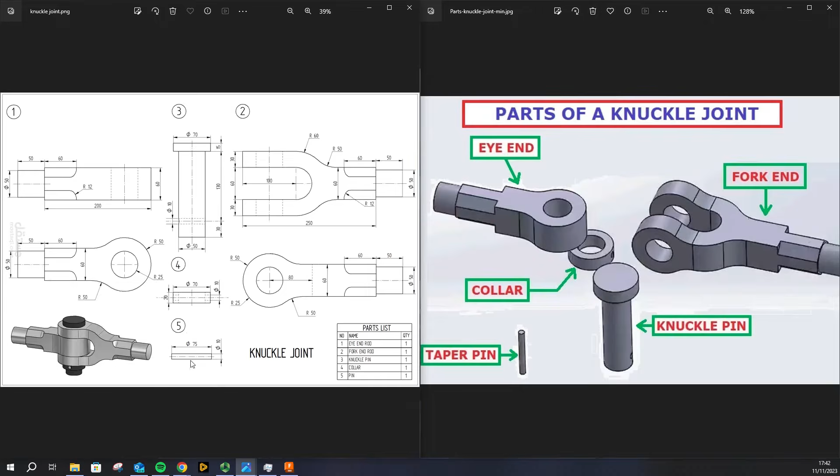Just one thing to point out that in this engineering drawing, this 75 should not have this diameter symbol. And if you see an R before the dimension value, it's basically a radius. And another thing to note is that if the units are not specified, you can assume them to be in millimeters. So let's make this cylinder of length 75 and diameter 10.

Okay, so in your Fusion workspace, let's save this file first and let's call it 5.pin. And very quickly, it's just a cylinder, so a new sketch, C for circle, diameter 10. And we know that we are right now in the sketch workspace because we have the symbol. So make sure you finish the sketch and we'll extrude this. So create, extrude, and the height is 75. That's it. So we've got our first part done. Let's save this.

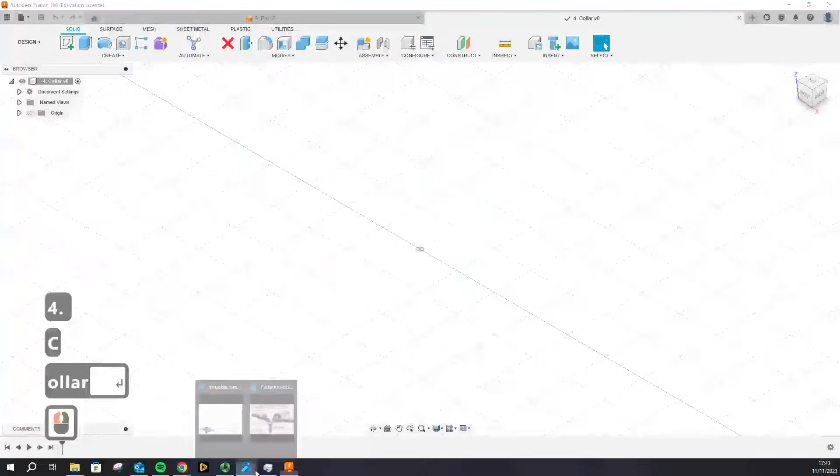Let's go ahead and start making the second part and save this as 4.collar. Let's have a look at the dimensions quickly. So the collar is essentially a ring and we can make it using 2 concentric circles. So over here, the outer diameter of that ring is 70 and we need to find the inner diameter. And if we can visualize the assembly, we know that the knuckle pin is what goes into the collar. So the diameter of the knuckle pin should be the same as the inner diameter of the collar. So we've got 2 circles, one with diameter 70, one with a diameter of 50. Okay, so let's make that.

So C shortcut, 50 and another one 70. Okay, let's finish this and let's extrude it. We need to know the height of the collar. So for that, we'll go back to the drawing. The total height is 20. So let's change this value to 20.

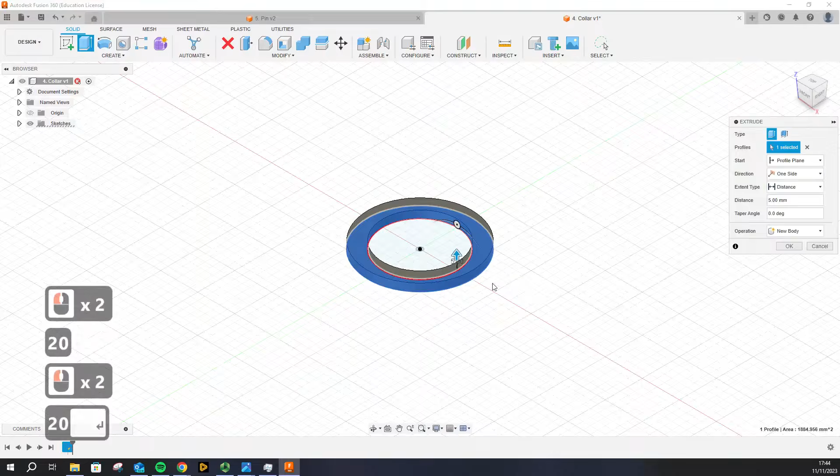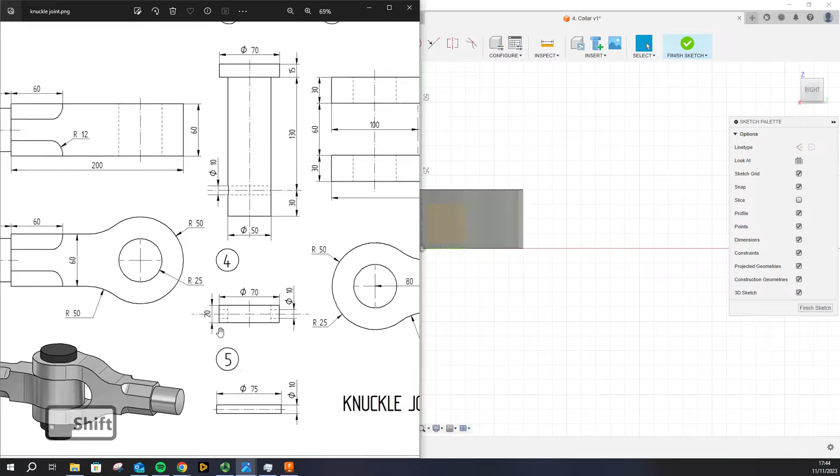One more step before we can finish the collar, we need a through hole. So as you might have already understood, we can use either of the two planes, so any plane that's perpendicular to the base plane. So let's choose that one. And we need to make a circle for the through hole. Before that, we need to find how high above from the bottom plane it is. And from this, we can figure out that the hole is at the center of the total height. So it has to be half of 20.

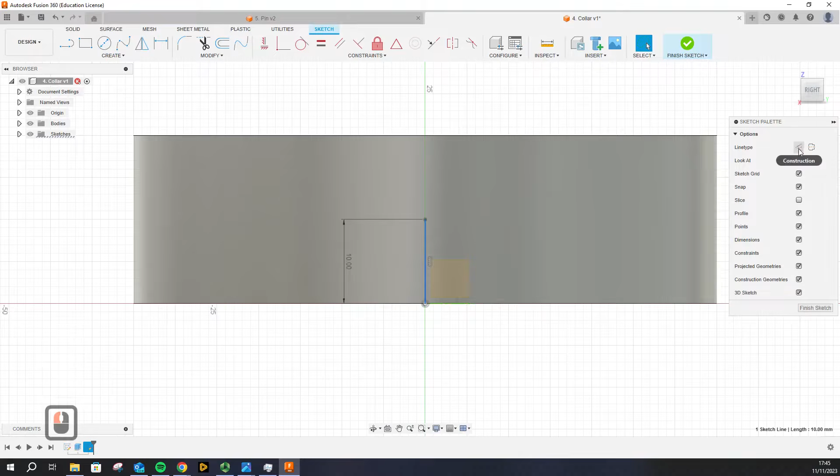So let's make a reference line from the origin and we can use math because Fusion can do math for you. So we can do 20 by 2, which is 10, but you can use Fusion for that. Let's convert this to a construction line. You can change the line type by clicking construction in the sketch palette. And let's start a circle. We'll use this point for the center of the circle. The diameter is 10 and we've got our circle here. So we can finish the sketch now and very quickly go to create, extrude and start extruding it.

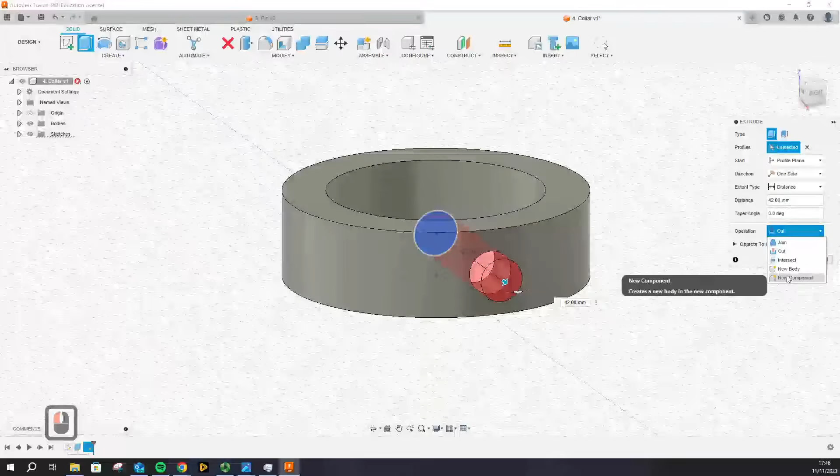One thing to note is that it is a new body that is being created and as soon as it intersects with another part, it recognizes that subtraction or cutting might be the operation that the user might want and that's why it changes to cut. You can also notice that from the operation in the dialog box. You've got multiple operations, so you can change it back to a new body or you can join it. But right now we want to cut it. Also, because we want it in both the directions, let's change it to symmetric. Okay, so that's our collar done. So let's save it.

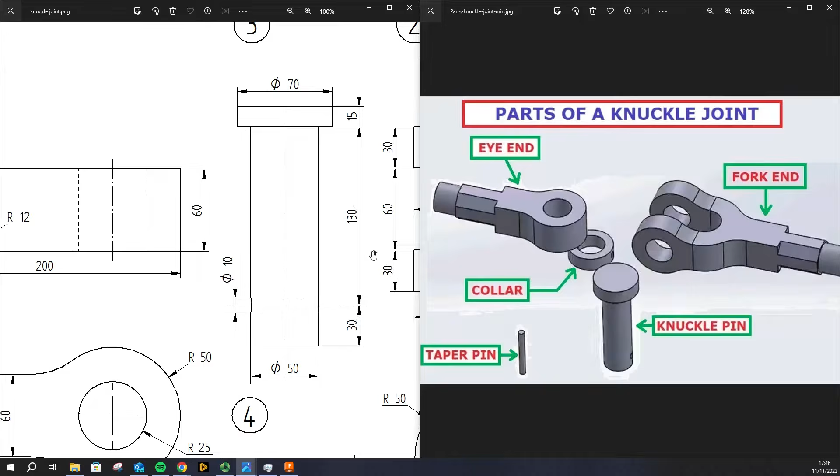Let's start making another part without wasting any time. Let's call it 3.knuckle pin. For that, we need the dimensions again. So knuckle pin is essentially a cylinder, a very tall cylinder with a disc on top and a through hole. So let's make this tall cylinder first. Two things for the cylinder, diameter and the height. So the diameter is 50 and how much is the height? It's 30 plus 130, right? So let's do that. Diameter 50. Let's make a circle. The same process. So C for circle, diameter 50.

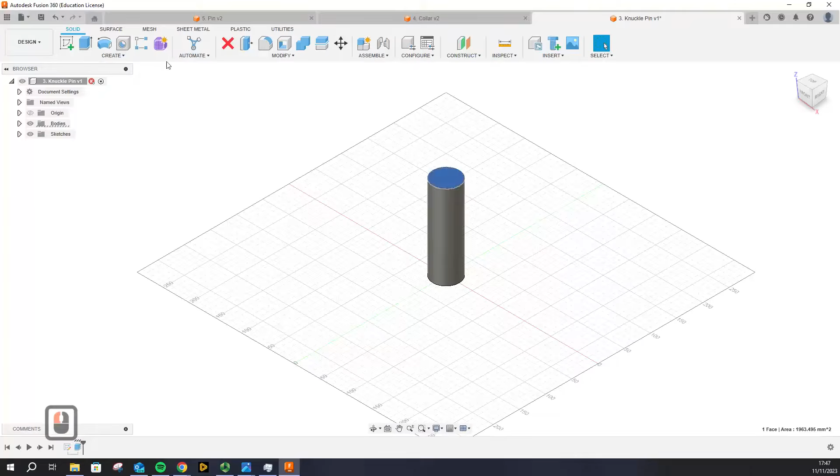Finish the sketch. Let's quickly extrude it. And we can do math, so 30 plus 130. So we've got a tall cylinder. This time we are going to start a new sketch on the top of the cylinder. So this will be our plane for the sketch. So click on that, create sketch.

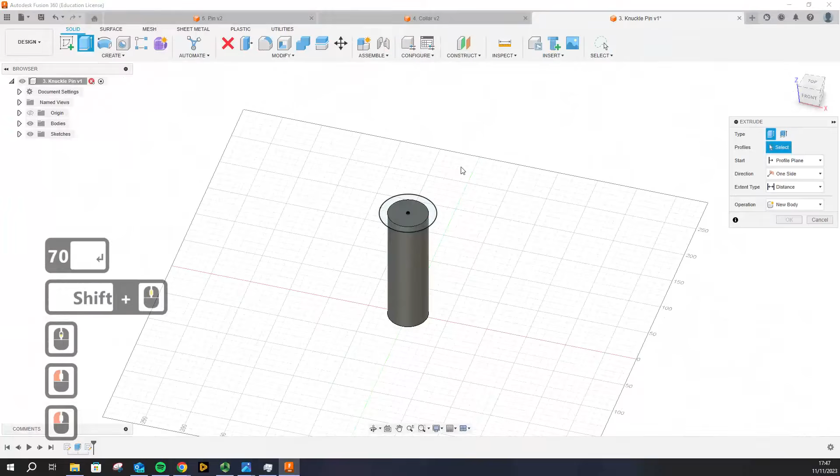And now we need to create a disk. And for that, again, a disk is basically a cylinder, so we need the diameter and the height. Diameter is 70 and the height is 15. So diameter of 70. Finish the sketch. This time we have to extrude it again. Just make sure that you're selecting both the profiles that you have, and the height was 15.

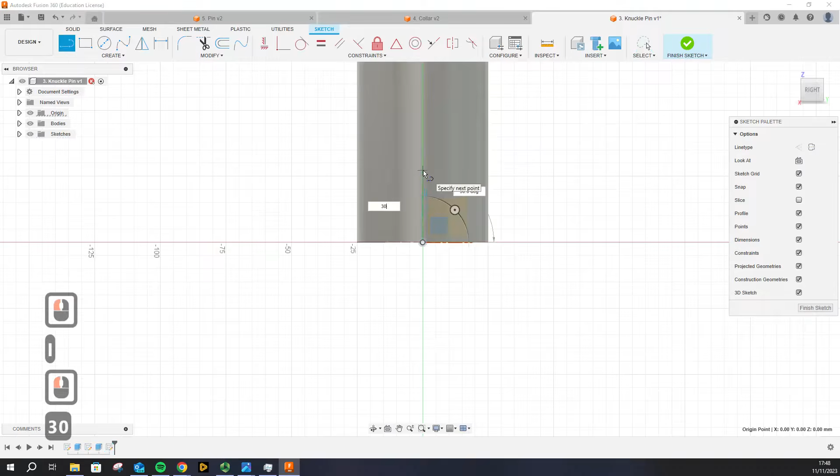We just need to make a through hole just like the collar. For that we will turn on the origin and we can use any of the perpendicular planes again. We need to find the center point of the circle that we need for the through hole, and for that let's refer to the drawing again. So we see that the through hole is at a height of 30 mm from the bottom of the pin. So let's make a line that starts from this point, is 30 mm in height. Make sure it's a construction line, and let's make a circle of diameter 10.

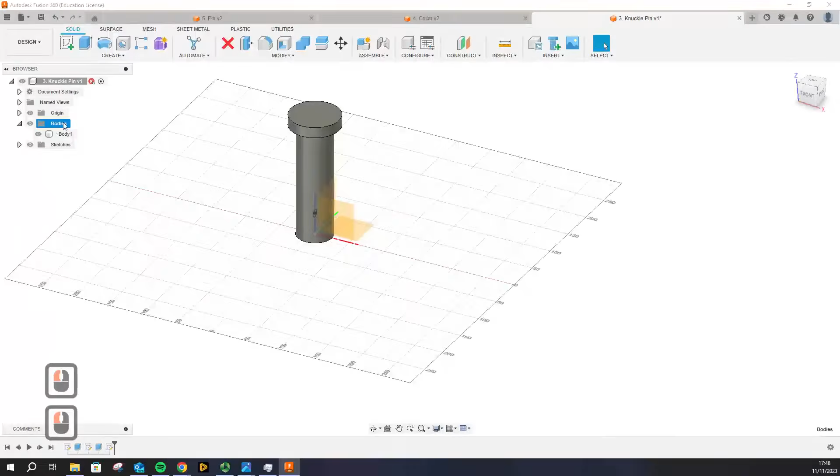So this time for extrusion, after you finish the sketch, you might not be able to very easily click on that because you've got a body. So just to quickly draw your attention to this, all the bodies that you make in Fusion are in a folder called bodies, so you can turn it on and off. You can toggle it. Similarly, for sketches, you can toggle the sketches on and off. So this was the first sketch that we created. That's the third sketch essentially, and that's the second sketch. So you can work with all of them, right?

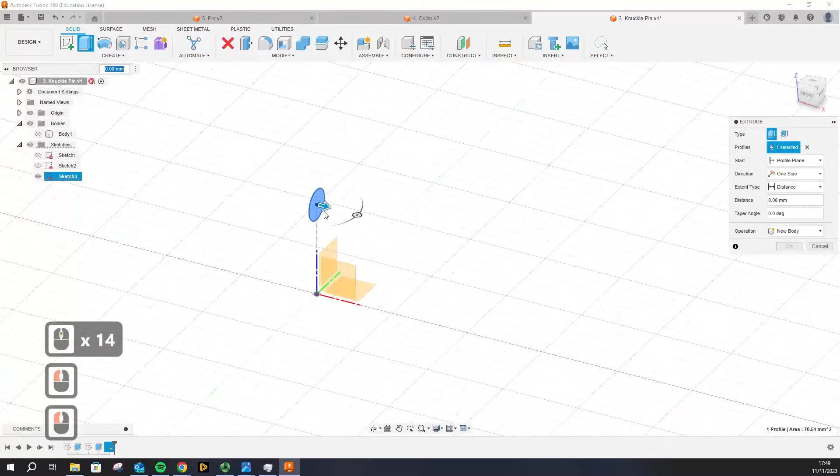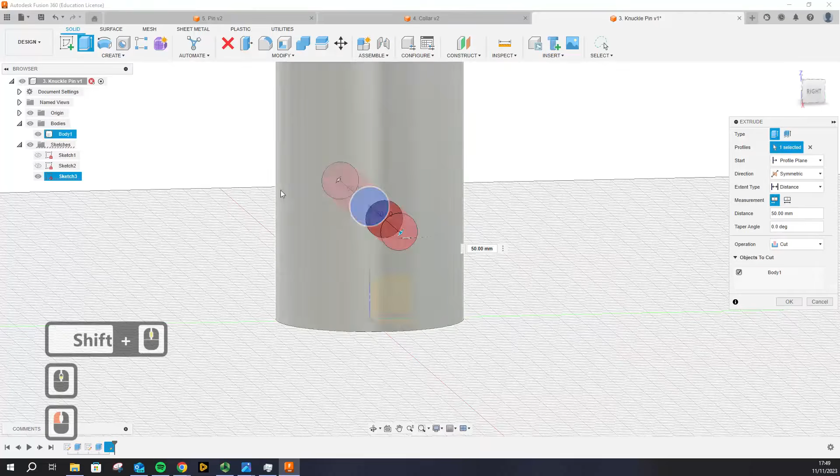So for now, we will turn the body off and we will select the extrude command, select the profile, and we'll start dragging to make the hole. Again, we want it symmetric, but right now it's not subtracting from anything. And that is because the original body, the knuckle pin, is hidden. So we need to turn that on. And as soon as it's on, Fusion recognizes that we want to cut it. And you can also check that it's cutting through body one, which is your knuckle pin. And you can click OK after this. And you've got the through hole, and your knuckle pin is done.

Okay. I know I'm going quite fast, but please make sure you're watching it at an appropriate speed if you want to. Because till now all the steps that we did were very simple and you should be fairly comfortable in doing them now.

Okay, so let's make the next part, which is the eye end. It's called the eye end rod. So let's save the file. One dot eye end rod, and let's look at the engineering drawing. So we've got the drawing over here. Bring it here. Okay, so we've got two views for this. This is the top view, this is the front view.

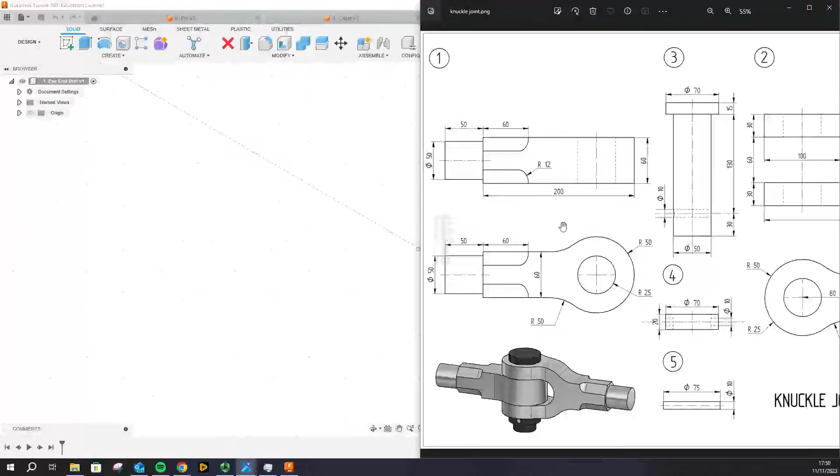It looks a little bit complicated, and for any complicated part you're making, we just try to break it down into smaller parts, which are simple to make, and we combine them. And that's how we are going to make the fork end and the eye end. Okay, so we can see that we've got two concentric circles. So let's go step by step.

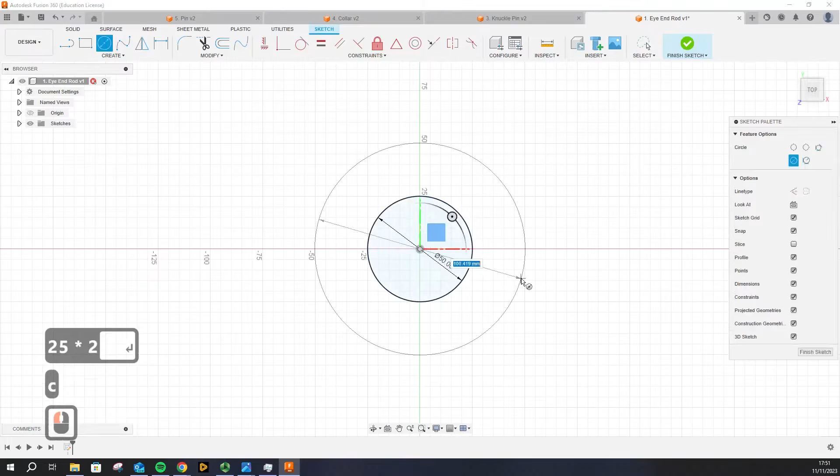Let's make those two concentric circles, one with a radius of 25, the other one with a radius of 50. Remember it's a radius, so we have to give a value that's double the radius. So 25 times 2, and another circle, which is 50 times 2. Right. So we've got these two concentric circles.

One thing more we can make is a rectangle which passes through these two circles to make the rest of the body. And hopefully you will understand it after we've done it, but just try to visualize. So we need a rectangle which is of a width 60 and a length 200. But one very important thing to notice is that that rectangle starts from this edge of the concentric circle.

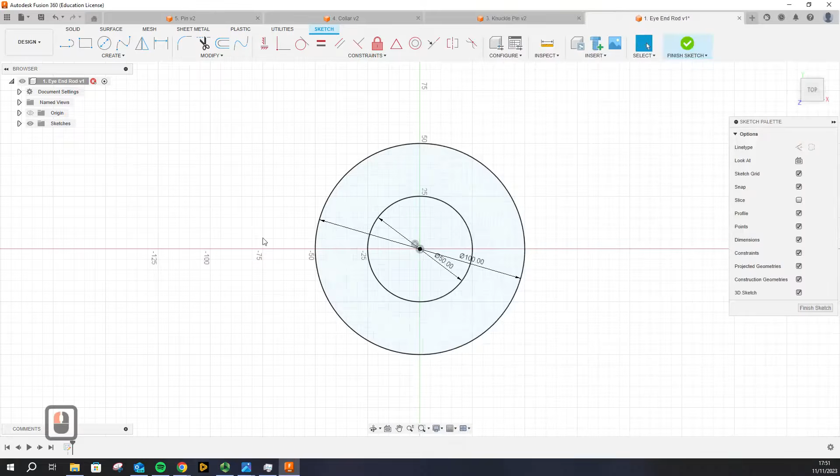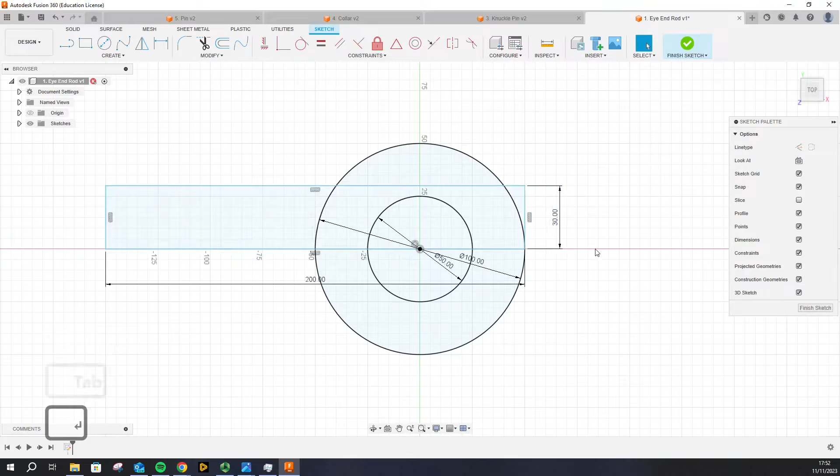Okay, so to make this rectangle, and because we know it's symmetric, we can make two rectangles. We can start from this edge, we can make half of the rectangle, so the length is 200, but the width is 30. Also, to toggle the dimensions, because you need to give two dimensions for the rectangle, you can use the tab button on your keyboard. Okay, so 200 by 30 and another rectangle, which is this time at the bottom and also with dimensions 200 times 30. Okay, so we've got this shape which has a lot of lines in it.

One thing I want you to note right now is that you only have one sketch, and all the lines till now I've created, the two concentric circles and the rectangles, are in a single sketch. Please make sure that if you've got more than one sketch, please delete any of the sketches and just make all the lines in a single sketch. And why do we need that? We need that because we need to use the trim command to remove any of the lines, and that only works in a single sketch.

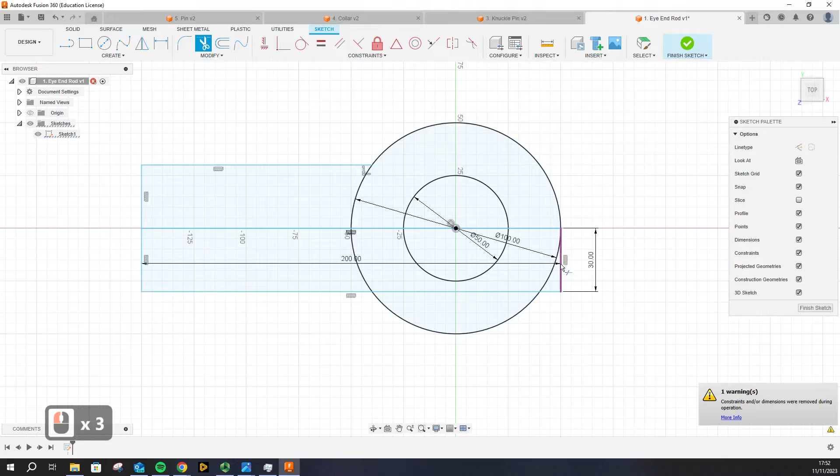So trim command lets you remove any of the line segments in your drawing, and if you try to hover over any of the lines, you can just click on them and delete them. So we want to get rid of some of the extra lines. You might also note that the middle line, you might have to click twice because remember we made two rectangles, so it's overlapping two lines. Okay. So what we want to achieve is something like this.

Before we actually finish the sketch, I want to quickly show you the fillet command. So fillet is basically curving two edges which make a sharp corner. So if you've got a sharp corner or a vertex over here, we can actually make a curve over here, which is called a fillet. And that's what we are going to do. So you select the command and you click on the two edges. Then you can drag this arrow around to make it smoother.

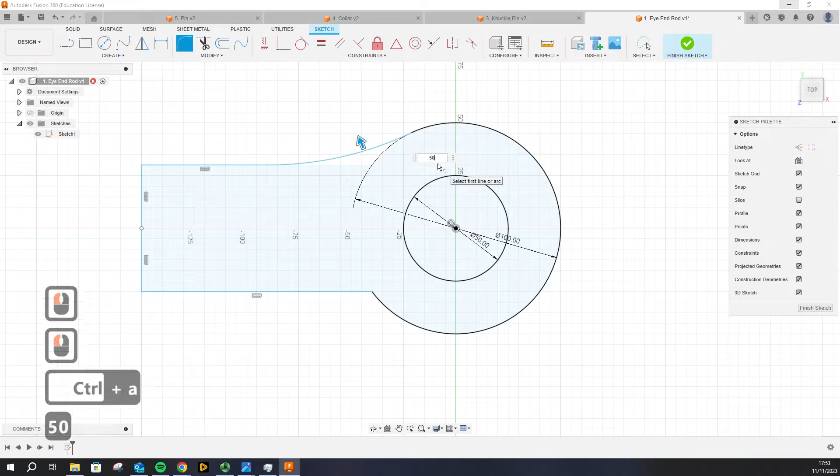And we need a fillet radius for that, and the radius over here is 50. So let's give this value 50, and we ideally need it on both these ends, but for now just bear with me, do it on one of the ends. Okay, so let's finish the sketch and let's extrude it. We need to know the height, and we can see that the height is 60, so let's extrude it for 60.

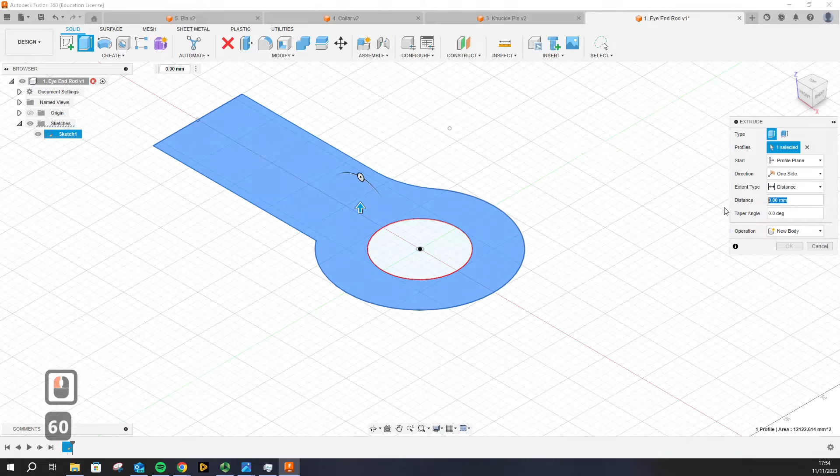Okay, now you notice that this side is very smooth, that's how we want it, and this side is not. And I deliberately did this so that I can show you the fillet command in 3D. So fillet can be done in 2D as well as in 3D. So if you go to modify, you click on fillet, you just need to select any of the edges that you want to make smoother.

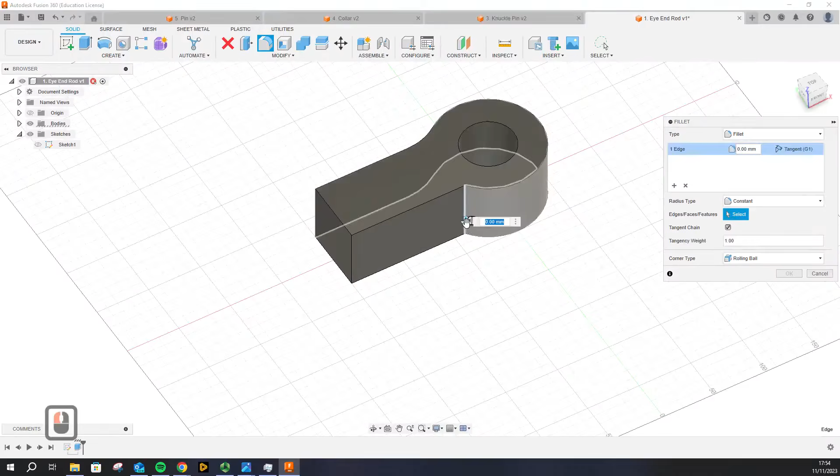So for example, in this case, we want to make this edge smoother. We just want to drag it out to make it as smooth as we want. We know the fillet radius is 50, so we give it 50 and press enter. So now both the sharp corners are equally smooth, and we can go ahead and make the rest of the features.

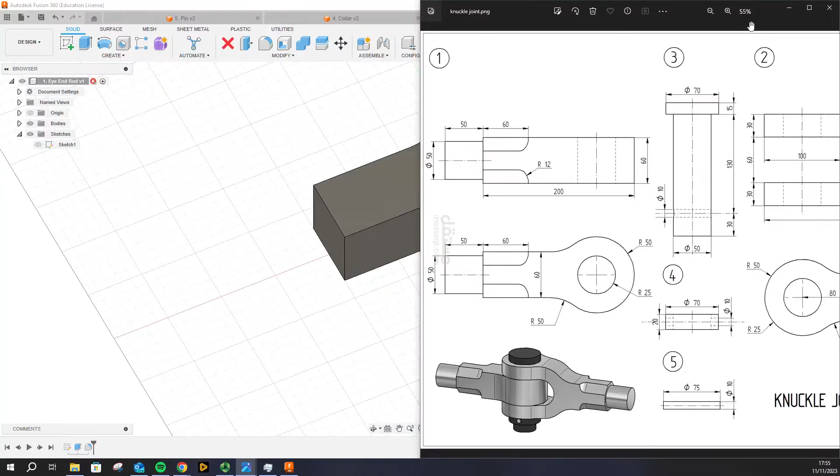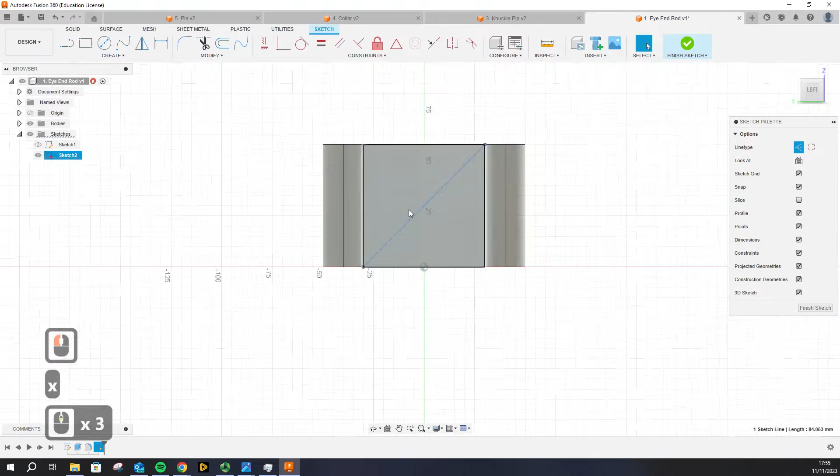Okay, so after this we've got these cylindrical ends. For a cylinder we just need the diameter and the height again. Diameter of the circle, right? So we are going to make a circle on this face. So select the face, start a new sketch. Also, we need to find the center point. For that, we can create a diagonal on this square, and essentially it's a construction line. So let's change it to a construction line. The shortcut is X. We are going to make a circle with C, and the diameter is 50.

Make sure that you have been able to find the center. So if you did not notice, I'll show you again. When it is the midpoint of the line, the cursor actually changes to a triangle. Okay, so make sure you've got that center perfectly correct. So we make the diameter 50, finish the sketch. Let's extrude it to a length of 50. So we've got a cylinder as well.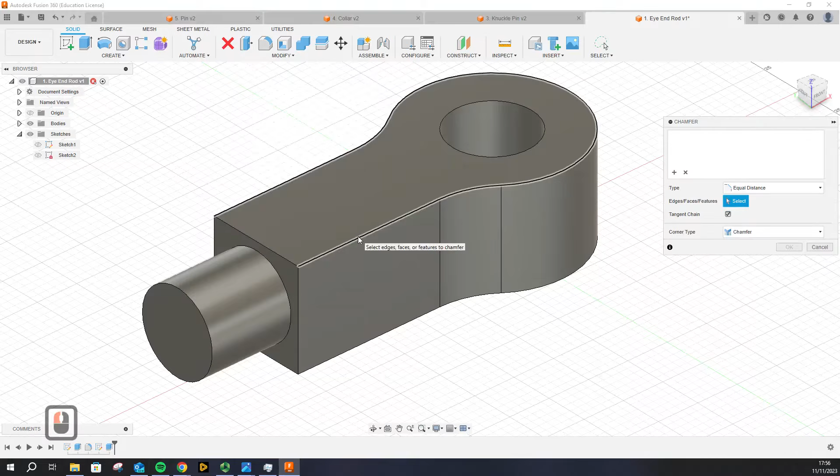Just one last thing to do in the eye end is to make these features, which are the flat features. Before we do that, I want to show you another command, which is called chamfer. So we've seen fillet. Another command is chamfer, which actually lets you flatten the sharp edges. So fillet lets you curve or smoothen or round the edges, but chamfer lets you flatten them. So let's try chamfer on this edge. And if you try and drag this arrow, you can see that the edge becomes chamfered.

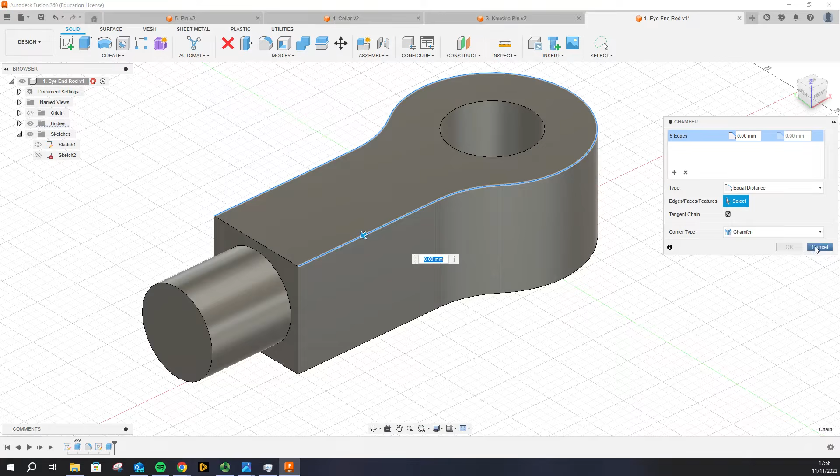But the problem is that this is not what we want because chamfer is a continuous command and it will operate on the whole edge of our eye end. But we do not want that because in our drawing we can see we only want it until a depth of 60. Okay, so for that, what we can do is we are going to make a polygon on this face. Let's see what a polygon is.

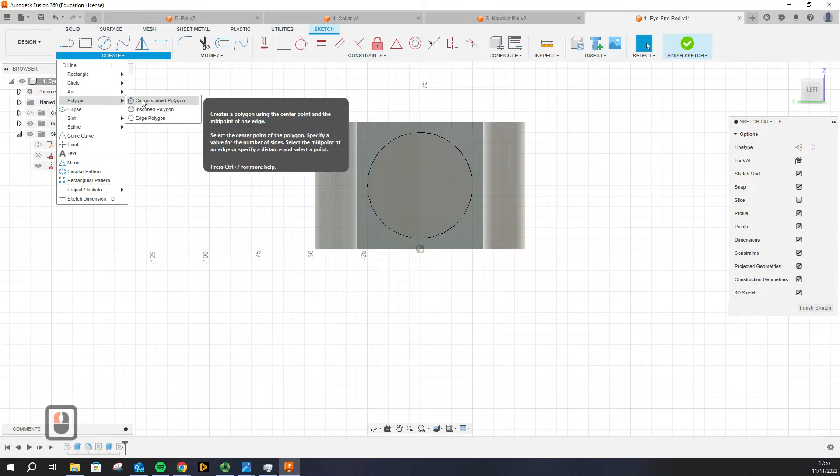So first we select this face, start a new sketch, and this time instead of a line, rectangle, or circle, we are going to go to the polygon command. There are two types of polygons, an inscribed polygon and a circumscribed polygon. An inscribed polygon is basically a polygon that's inside a circle, so that's the easier way of understanding it.

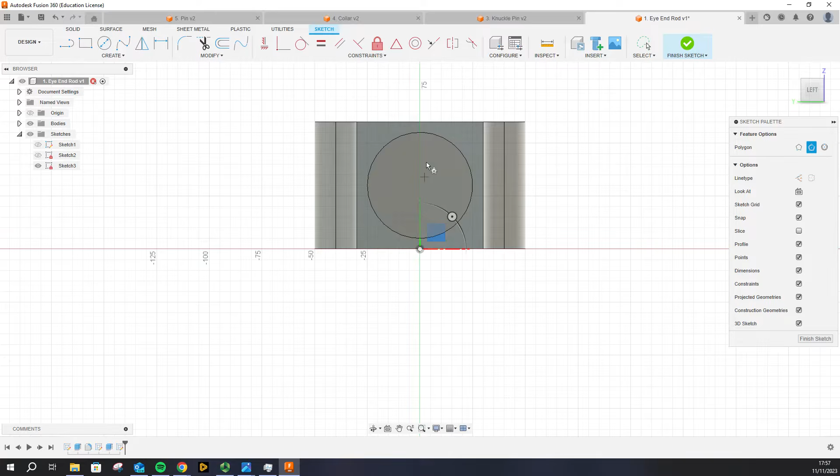Circumscribed is the opposite of that. So this time we'll be choosing the circumscribed polygon. Works very similar to a circle. You select the center point. You should be able to very easily select it because you already have the cylinder there. So select the center point and you drag it out.

Okay, we don't know the dimension of the edge for this polygon, but what we do know is that we need an octagon. By default, Fusion makes a hexagon with 6 edges. So go ahead and change the value of 6 to 8. The next thing, we don't have to give a specific length, but what we know is that the edge of the polygon is coincident or is aligned with the edge of this square face.

So we can go ahead and select any of the center points of this square edge, right? So origin would be the safer choice. You can do it, then finish the sketch. What this very quickly gives us is these four corners that would be useful to make that controlled chamfer edge. So we are going to use the extrude command again and select all of the four corners. If you can't select it, make sure you are rotating the view.

Okay, and then we can drag the arrow in. And as per the engineering drawing, we know that it has to be a length of 60. So let's make it minus 60. And the only thing left to do now is to make these edges curved, and we've already seen how to make these sharp corners curved. We use the fillet command.

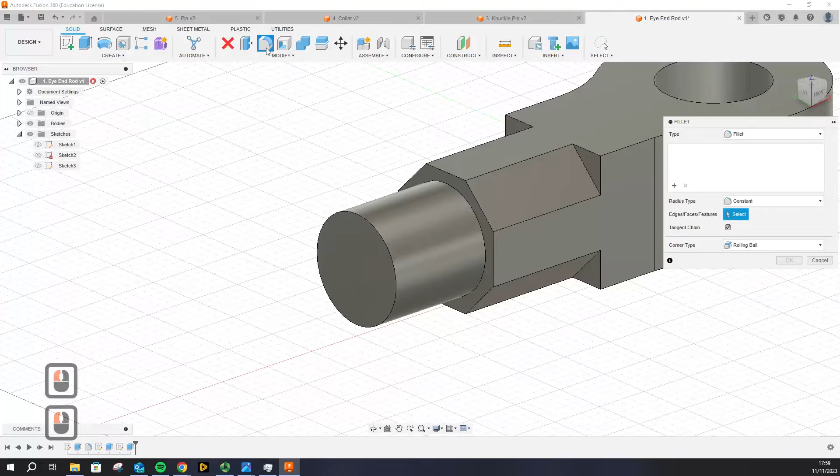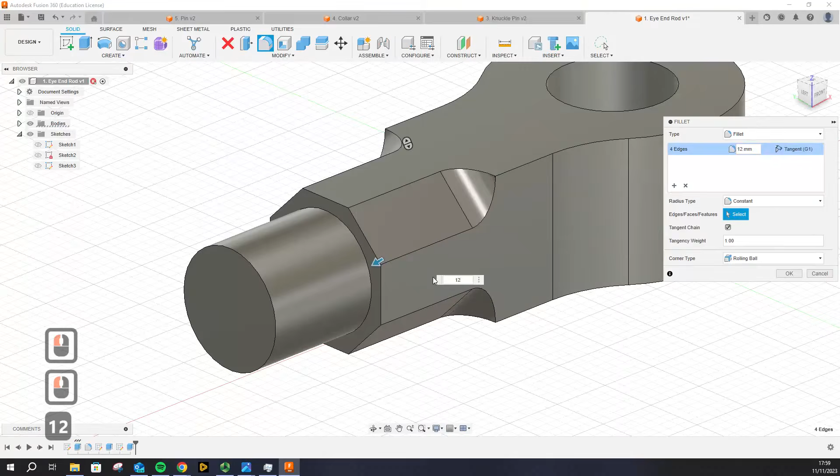So you click on fillet, select all the edges. If you forget to select some of the edges, you can do so by clicking on the plus button, but you can rotate the view and take your time, select all the edges. The next thing we need is the fillet radius because that is important and it's given in the drawing to be 12. So we'll change this value to 12. And that's our eye end rod done. Let's save it.

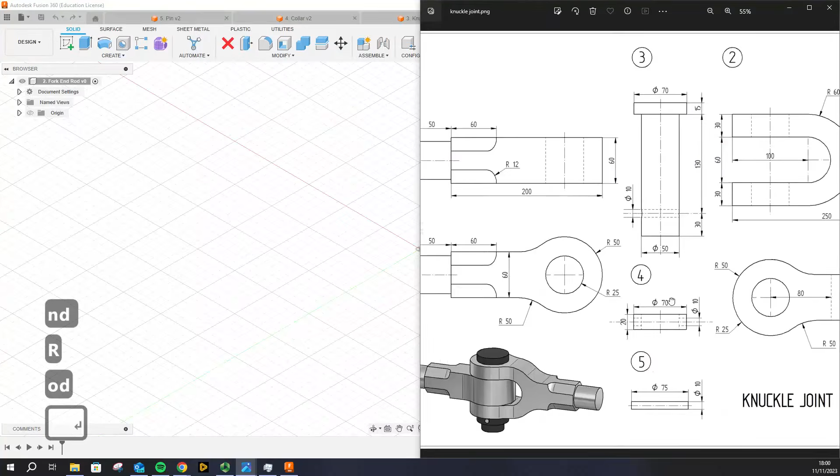And without any delay, let's start the last part, which is the fork end. So let's go ahead and save this file. Okay, so the same process, what we did, we try to break it down into simpler parts. One thing you should notice is that the fork end is a little bit more complicated. It has two discs instead of just one disc, two concentric circles, but we'll follow a different process this time and we'll see how to make the fork end.

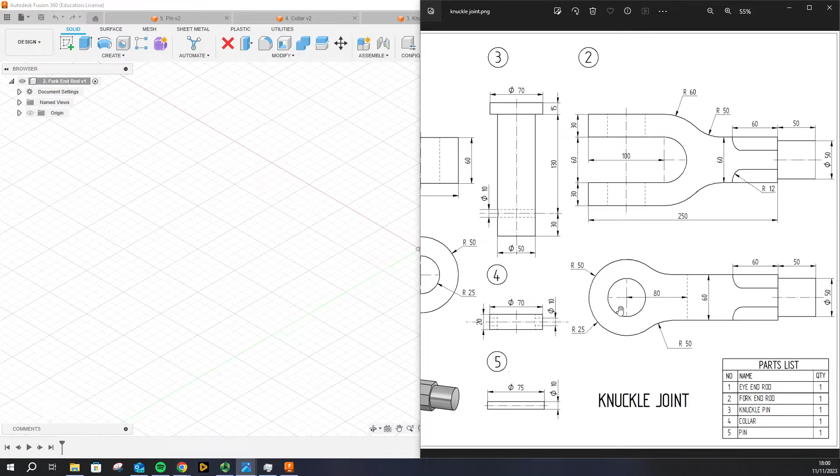Okay, so again, we will have a look at the top view first. We can still see that there are two concentric circles. So let's just do that, the same process. So a circle of radius 25. So I'm doing it twice because I need to give the value of a diameter and a radius of 50. Okay, this time I'm going to finish the sketch already and I'm going to just extrude this. Let's see how much should be extruded. So our extrusion should be 30 mm high. So let's go ahead and do that.

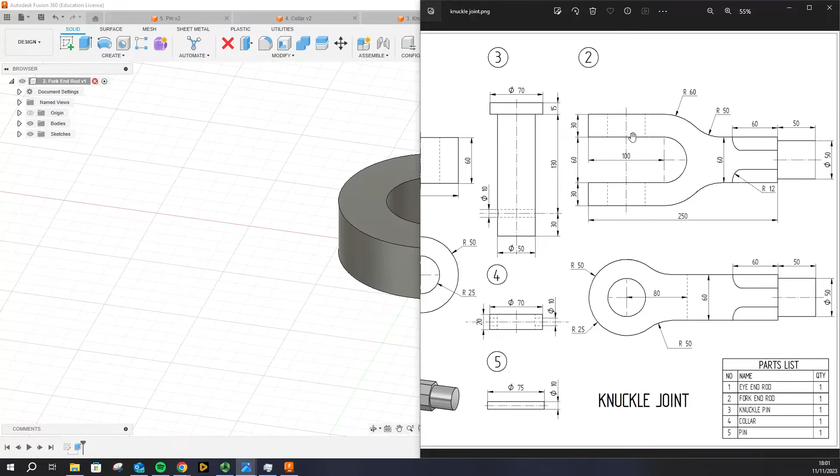Okay, now is the interesting bit because it's a command we have not seen before. But what we do know is that we have these two discs that are 60 mm apart. So basically we have another disc which is 90 mm higher than the original one. So what we can do is we can just copy this part and move it 90 mm up. So we'll go to modify, we'll select the move and copy command. Make sure the move object type is bodies because that's what we have right now.

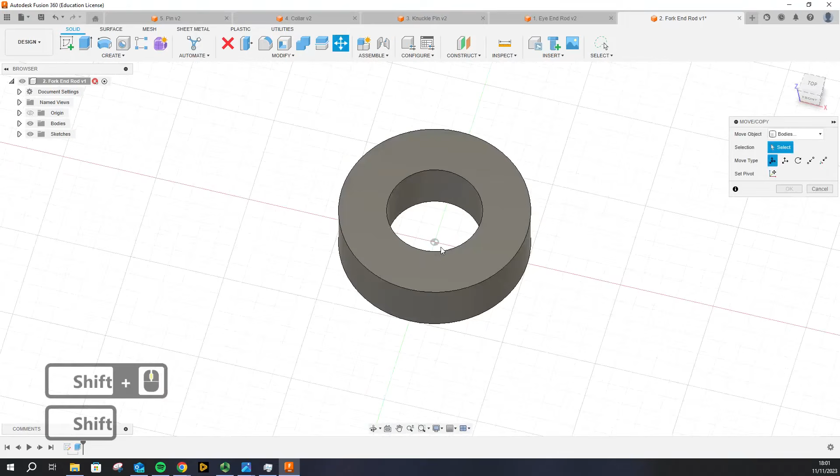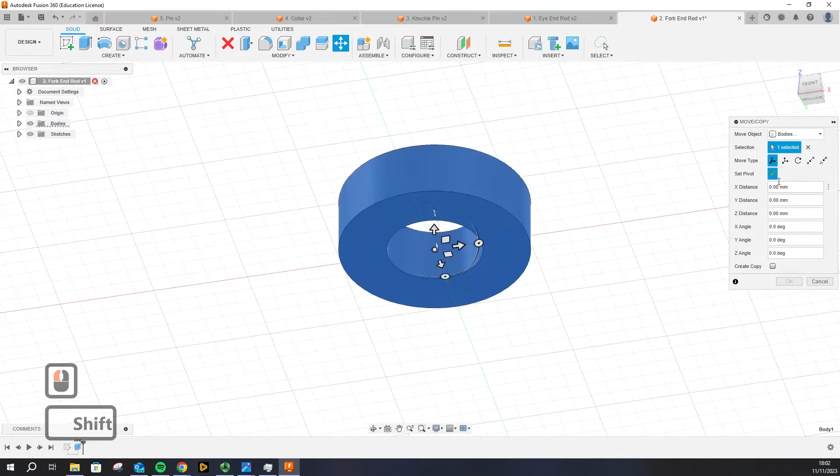So one thing you want to do is to make sure that the pivot point, basically the reference about which you're going to modify it, is properly selected. In this case, we will be selecting the bottom edge of this body. Before that, we need to select the body itself. So you need to click on set pivot and then you need to click on the bottom circular edge, either of the circular edges, which is fine. And after that, you need to press done for setting the pivot.

What this does is it fixes that tool, which is basically the 3 translation and 3 rotation motions that are possible, to that specific point. Basically, any modification will happen in reference to that point. Okay. To quickly know how much we should move it up, we need to know how far above we need to move. So for that, let's see how far it is. So I'll use this tool.

Our pivot point is set at this point, and this is our disk that we already have. And we want another disk which is over here. What we need is this distance. Okay.

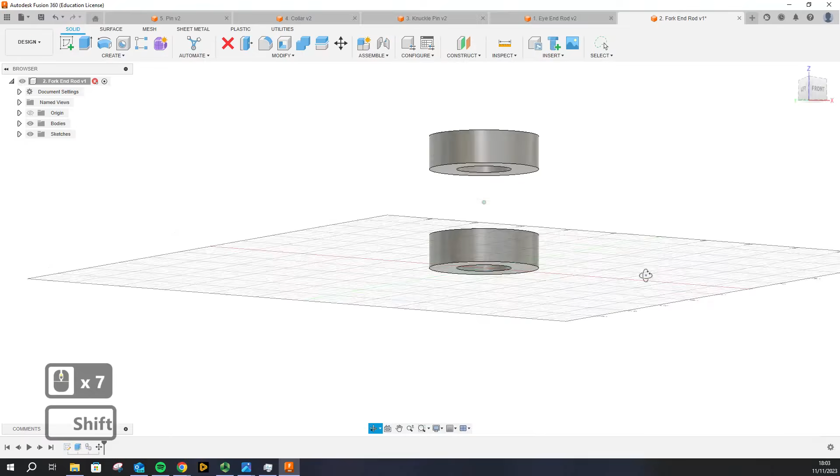And this is what? It is 30 plus 60, right? So let's not change the drawing as it is, but I just wanted to show you. So we are going to create a copy by ticking this box and we are going to drag it above. We've just checked that the distance between these two is 90, and we've made another disk which is having a separation of 60 between these two faces.

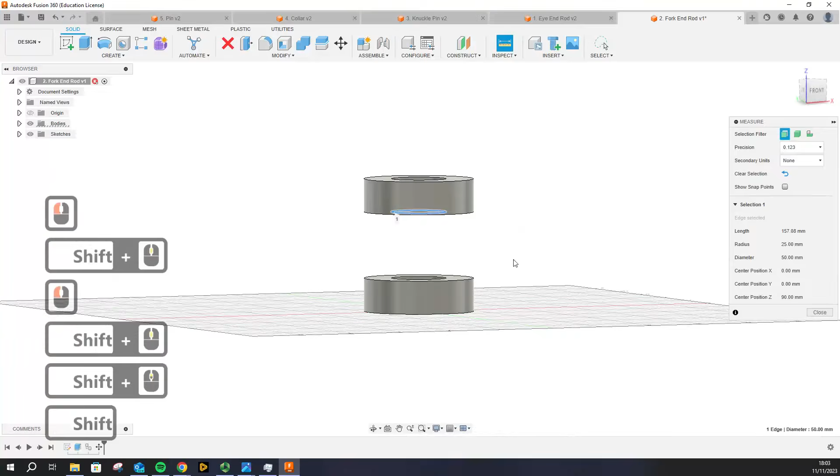How to check all of that? You can select both the faces. So if you press shift and you select both of these faces, in this bottom right corner, you can check what is the minimum distance between them. Okay. A better way to do it is to use the inspect tool called measure, and you can measure the distance between two edges. You need to just press shift when you select multiple edges or faces. You can see that the distance between them is 60.

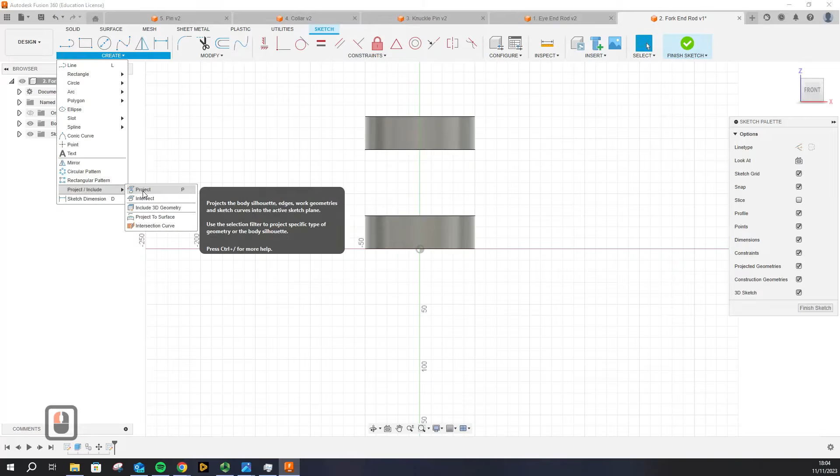Okay, so let's go ahead and make the rest of it. So we'll come to the front view. We are going to start a new sketch this time, and we'll see a new command called project. So you go to create, go to project, shortcut is P, and what project does is it essentially brings any edges from the 3D CAD bodies into our 2D drawing. Okay, so you literally just click on the bodies and you've got these lines. If I turn the bodies off, you can see these lines.

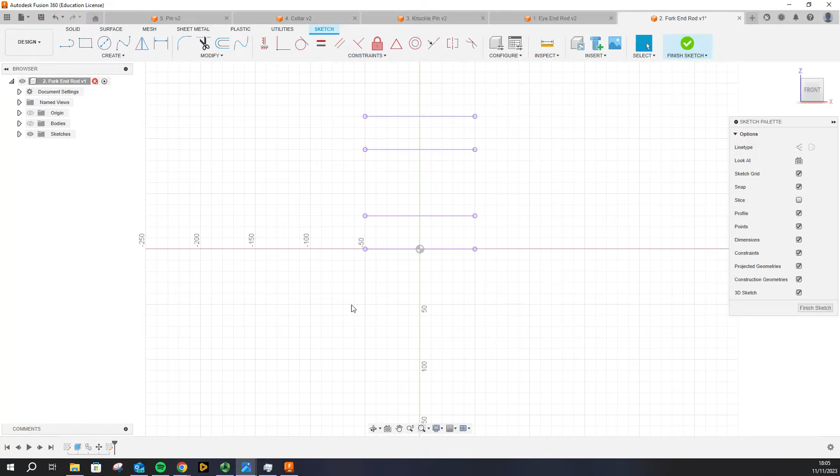Okay, and this will act as a reference for another view that we want to make, which is basically this view. Let me zoom into that a bit. Okay, so we've got these two disks, we've got these reference points. So let's go ahead and make a reference rectangle, which is basically 250 in length, and the total width is 30 plus 60 plus 30, which is 120, right? So 120 by 250, let's make that rectangle quickly now. So we'll start from one of these corners, give it a length of 250, the height is 120, and that's our reference rectangle.

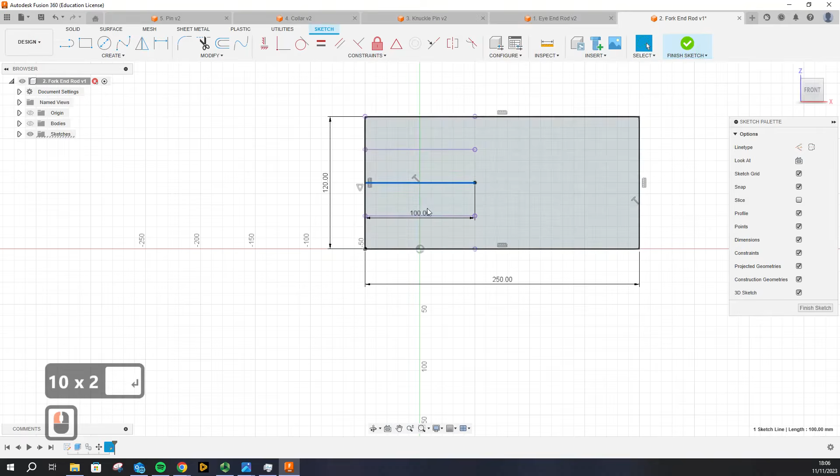The next thing we can see is that we've got these beautiful circular edges. So we've got one circle over here, which is at a distance of 100 from this edge of the rectangle. Okay, so let's go ahead and make that. So if we start a line from the center of this line, and how do I know it's the center? Because my cursor changes to a triangle. So I start making this line horizontal. Make sure you're snapping it to the horizontal plane. And I know the length is 100, so let's make it 100 long. We need to change it to a construction line, so let's use the shortcut X, or you can do it from the line type command here.

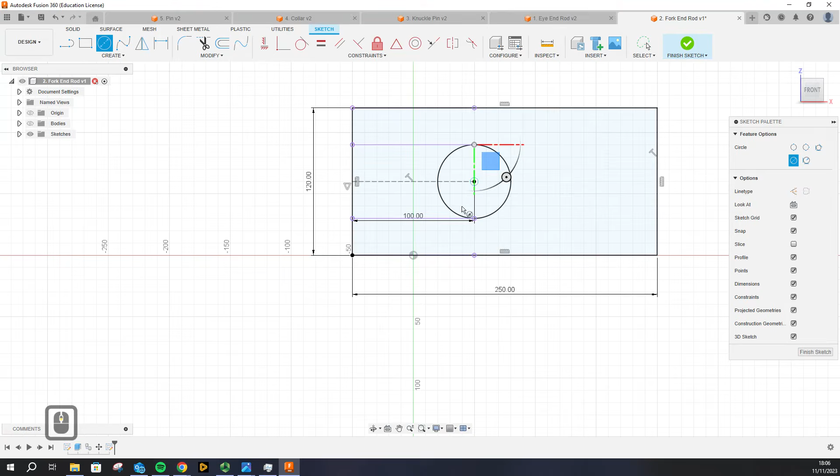Next, we will make a circle. You will use this as the center point and just snap it to one of the corner points that we have. We need to make another circle. You can have a look in the engineering drawing, but that circle basically goes to the very edge of the other point on our disk.

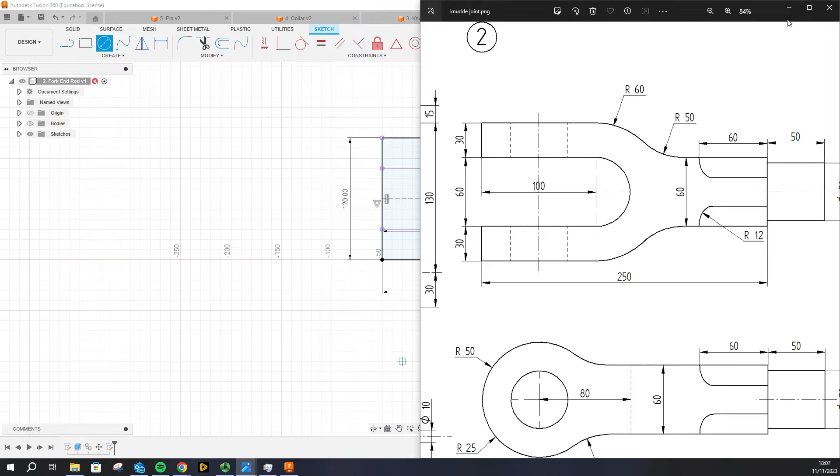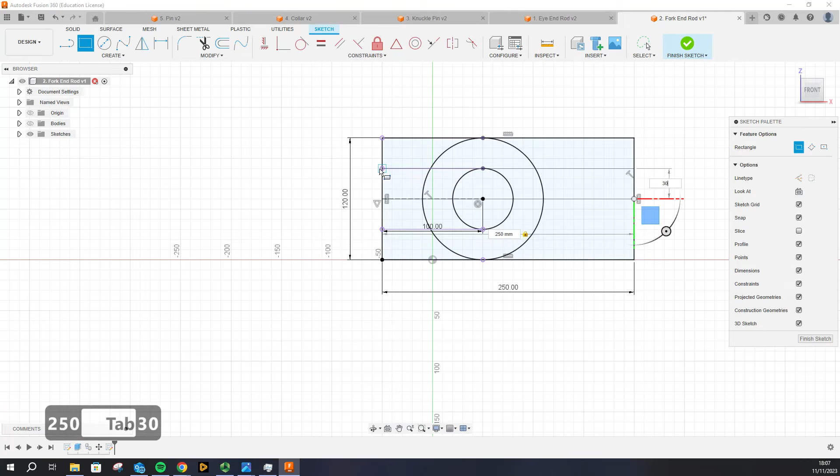Okay, next we need a similar rectangle that we made for the eye end to make the end of this rod. Again, the width of this is 60. We don't really know the length, so we'll make it all the way through 250. And again, we know that it's symmetric about the center line, so we will make a 30 tall rectangle from this center point. Again, how do I know it's the center point? Because my cursor changes to a triangle. So I've selected the 2-point rectangle. I click over here and I start making a rectangle. My length is 250 and my height is 30. I repeat it, but this time for the bottom side. So length of 250, height of 30, enter.

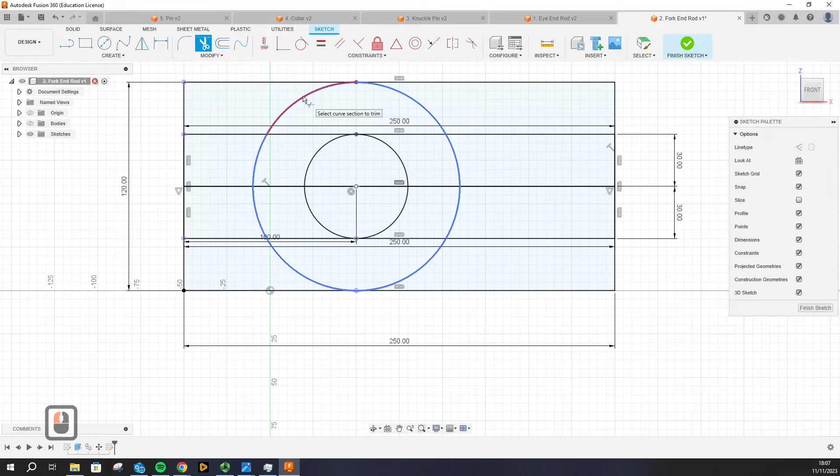Okay, we've got a lot of lines, we've got a lot of circles, so let's use the trim command. We've done this before. Let's get rid of some of the extra lines. So trim command, let's see if you can visualize which lines you should get rid of, but I'll show you what you should have in the end. We are just trying to achieve something very close to our final drawing in the front view. So this is how we need the sketch to be. I think I've got one extra line. Okay, so this is how our sketch should be.

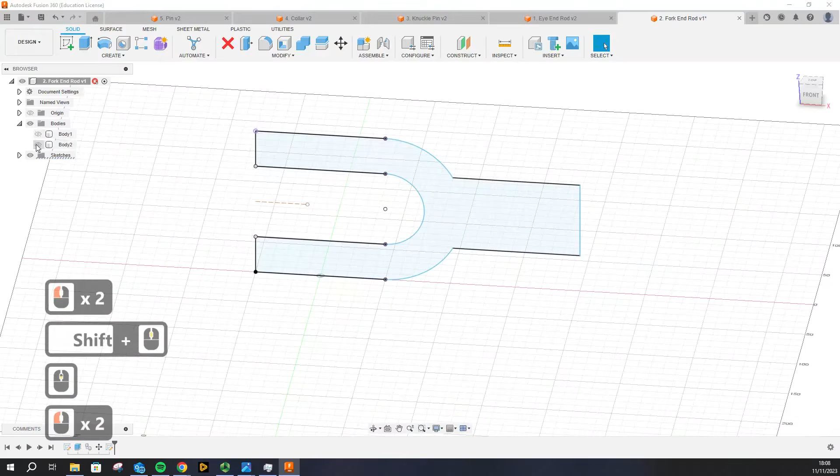So let's go ahead and finish the sketch, and it kind of looks like a fork. Also, if you turn the bodies on now, you can see that you've got the discs there, but this time we will keep both the bodies off, and we are going to extrude this sketch symmetrically, and we need to see how far we should extrude it, and that should be the thickness of this part. Again, because it's symmetric, we will be doing 30.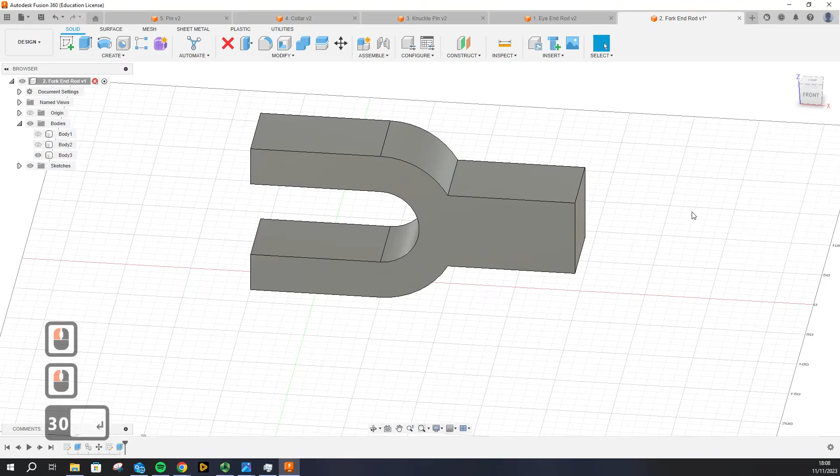So change the direction to symmetric, change the distance to 30, and we've got a separate part from the two discs that we made earlier. Okay.

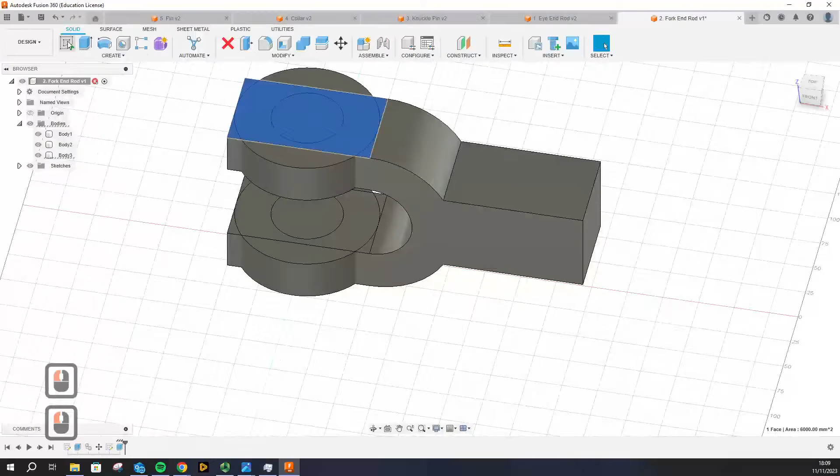Right. So before we join all these parts together and make the modifications, we need to do one more thing, and we need to make an extra sketch on this top face. So go ahead and select this top face, create a new sketch, and we are not going to draw too many things, we'll just use the project command because we need this as a reference later. So we'll select the disk, we'll select the rectangular face, and we press OK. That's it, you finish that sketch. And you will see why we did that in a second.

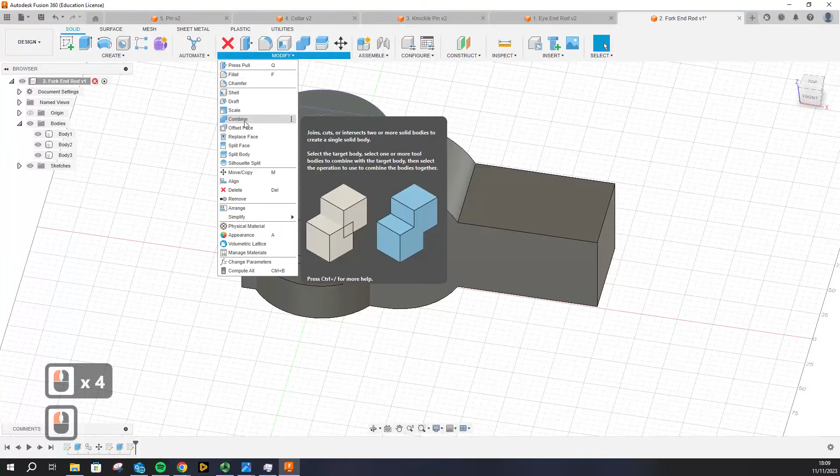So now the objective is to join all of these parts together. For that, we will use the combine option in the modify drop down. So you click on combine. Again, you can do different operations. You can join, you can cut, and you can intersect. You can explore these commands if you want.

We need to select two things. We need to select a target body, which will be the body that's going to be the final body, and everything's going to be joined to that. And we need the tool bodies. It can be one or more than one bodies that are going to be joined to the target body. So for our case, this will be the target body, and the other two will be the tool bodies.

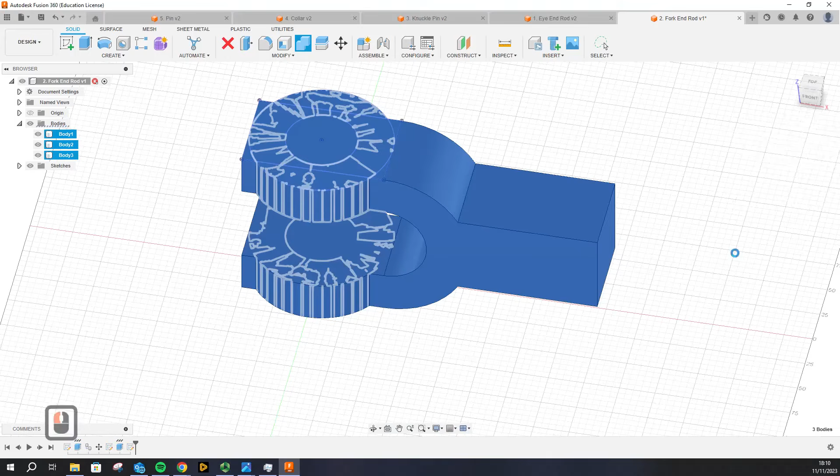As soon as you click OK, your tool bodies are going to disappear, which is body 1 and body 2. And the only thing you'll be left with is body 3 with everything joined into it. If you want to keep the tool bodies, you can do that by clicking on this keep tools option, but we don't want to do that for now. So let's just go ahead and click OK. Takes a while, but we've got something like this.

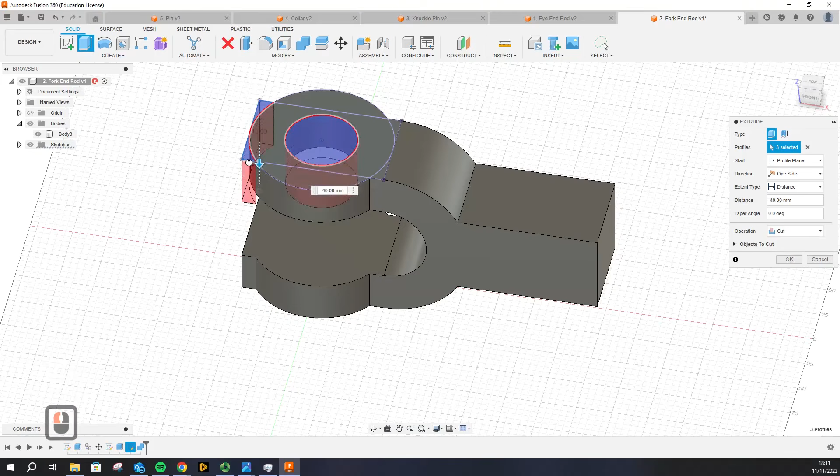Now you see that we've lost that hole in the center, and that's where this top sketch that we just made would be useful. So we will use the extrude command now. We will be selecting the center hole because we do want it, and these extra triangles which we do not want. So to make the hole, we'll just cut everything and also those triangles, and you can just extrude all of it all the way through. And voila, we've got the kind of fork that we wanted. We are very near to the end, so just keep going.

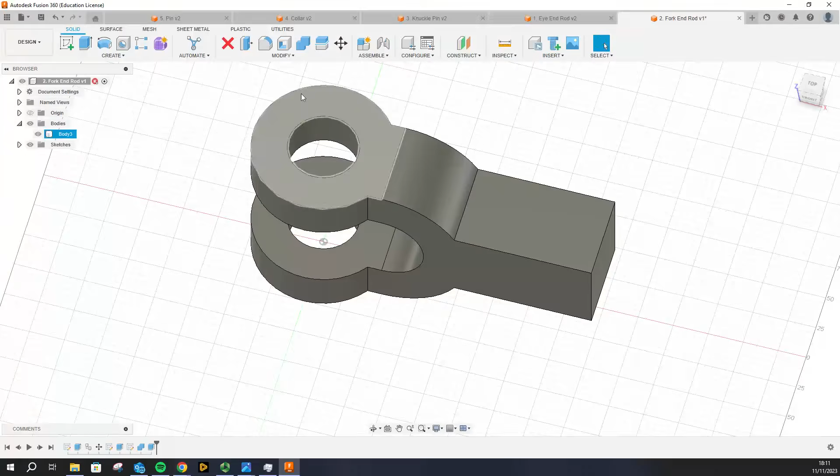Okay, so we want to make these edges, which are the sharp corners, curved or rounded, and we've done this multiple times now. We'll be using the fillet command. So go ahead and select these four edges. Let's see how much is the fillet radius. Can you figure out? Yes, the fillet radius is 50 this time. This is the view because you're looking in the front view, and also in the top view you can make sure.

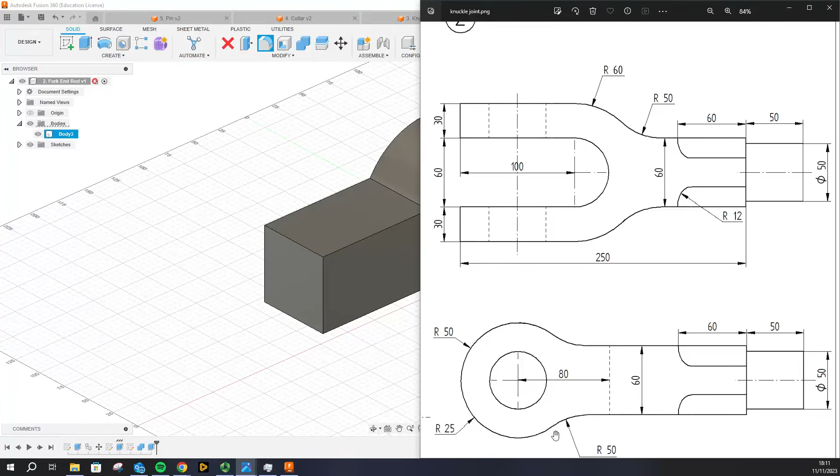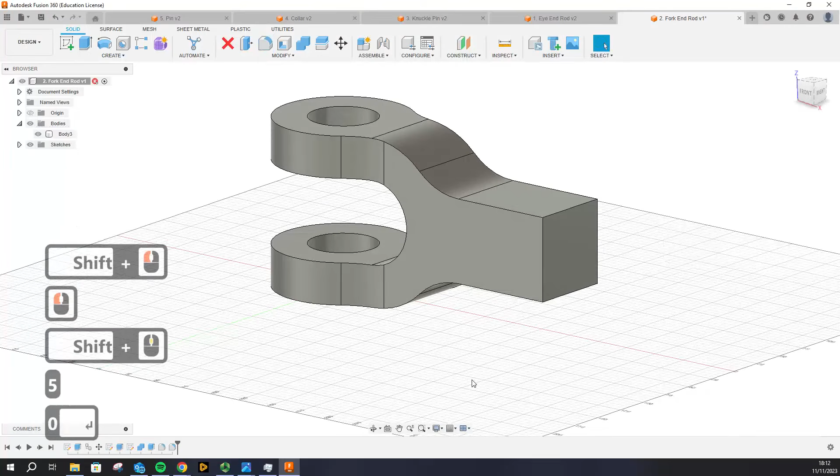So this is 50. So let's go ahead and do that. 50. And we've got another fillet that we need to make, which is just right there. And this one is 50 as well. Okay, so that's our fork more or less done. We just need to make the cylinder and the chamfered edge.

Okay, so the same commands that we did for the end, we'll create a circle over here and then use it as a cylinder. So just draw the diagonal to get the center point, change it to a construction line, use the circle command, make a circle of diameter 50, finish the sketch, and extrude it to a height of 50. Okay, I did it quite quickly, but you can play it slower if you want.

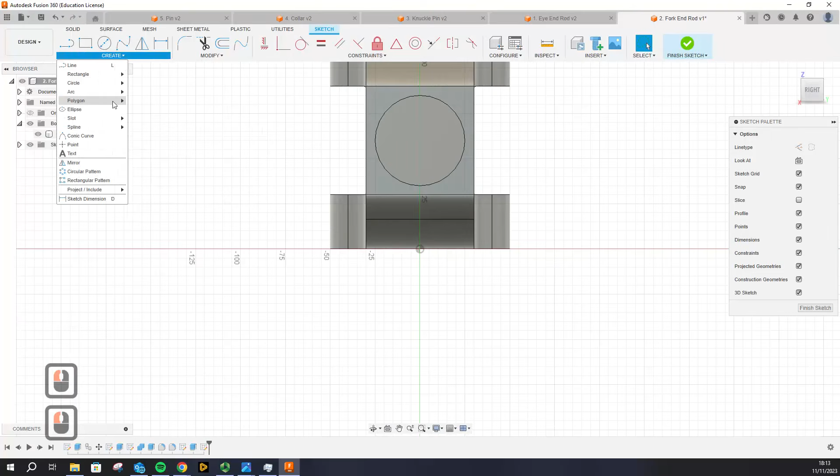Next, we need to make a polygon on this. We've already seen that. So start a new sketch, go to polygon, circumscribed polygon, find the center point. Because we don't know the dimension, we are going to snap it, but before that, change the number of edges to 8 so that we have an octagon. And just like last time, we are going to snap it to one of the center points of the edge of the square. Once you've done that, you can finish the sketch.

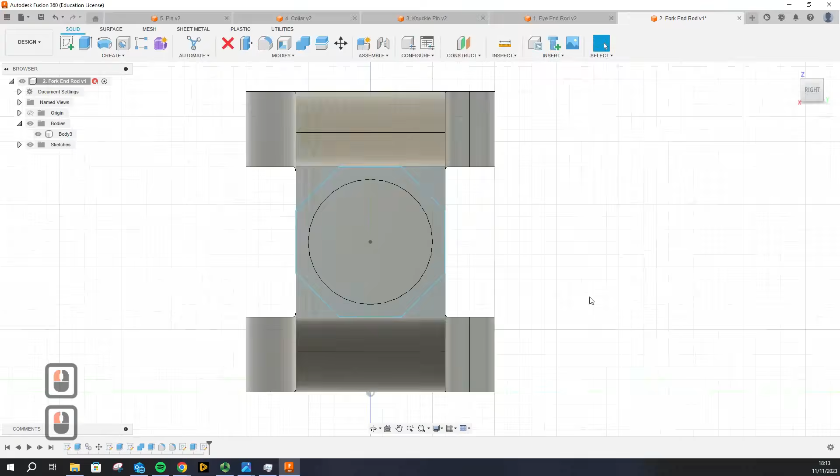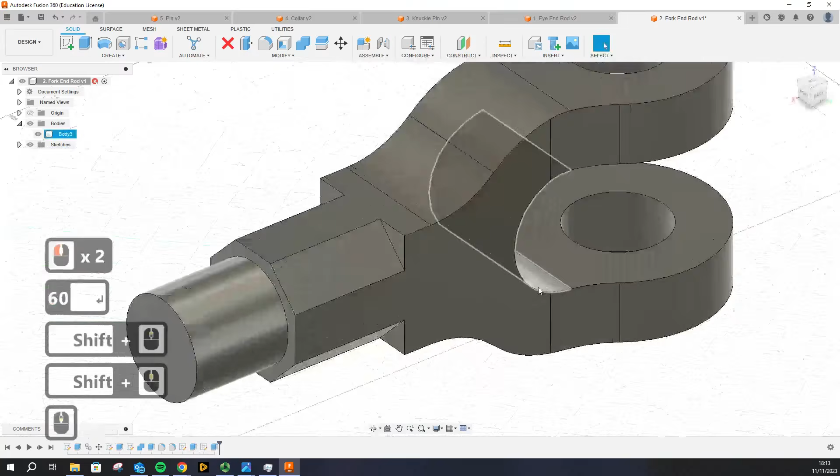Okay, let's do the extrude command. So we'll be selecting these 4 corners and we'll be dragging them in just to see how far we have to go. It is 60. So let's do this minus 60, right? And we just need to make these edges smoother again. So we'll be using the fillet command for the last time.

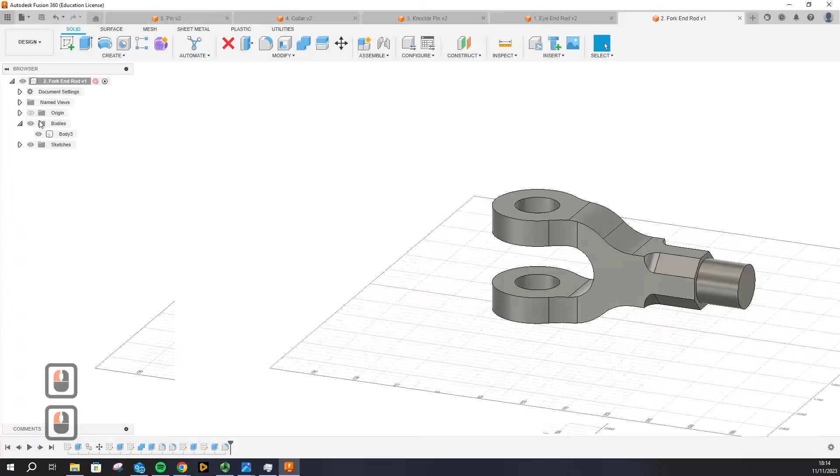Okay, once you've selected all of these 4 edges, we can check the fillet radius. It should be the same, it's 12. So let's give it a value of 12. Press OK. That's your fork end done. So now we have seen all the 5 parts. Make sure you have saved all of them so that you can assemble them in the next tutorial.